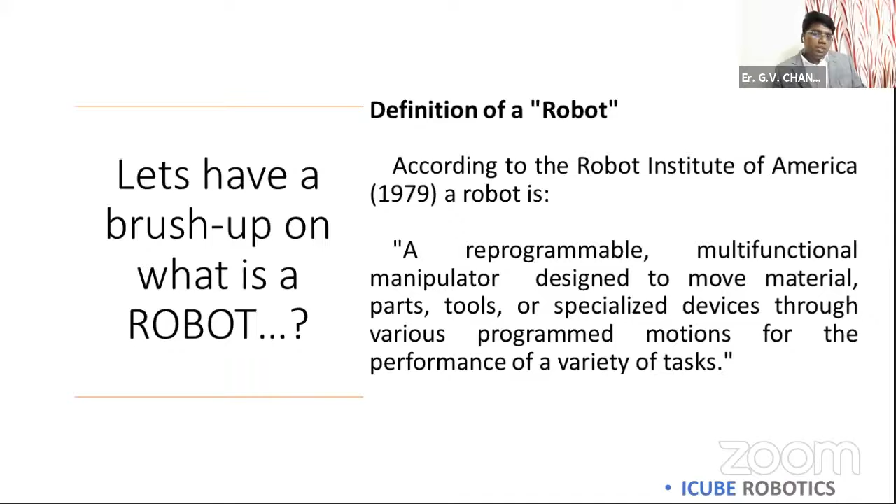That iRobot movie focuses completely on the three laws proposed by Isaac Asimov. Any company producing a robot will be very careful to make sure it follows all three laws. He proposed that whatever robot you make, before it comes into the market, you have to check that it follows three conditions. What are the three conditions?

First, whatever robot is made, that robot should not injure human beings. That is the first criteria of the law proposed by Isaac Asimov.

Secondly, he proposed that whatever robot you make should obey the orders given by human beings, where such orders should not conflict with the higher order law. This means the second law states the robot should obey orders, but not in a way that injures humanity or human beings.

The third law says the robot should protect itself, again with the condition that such protection should not conflict with the higher order law.

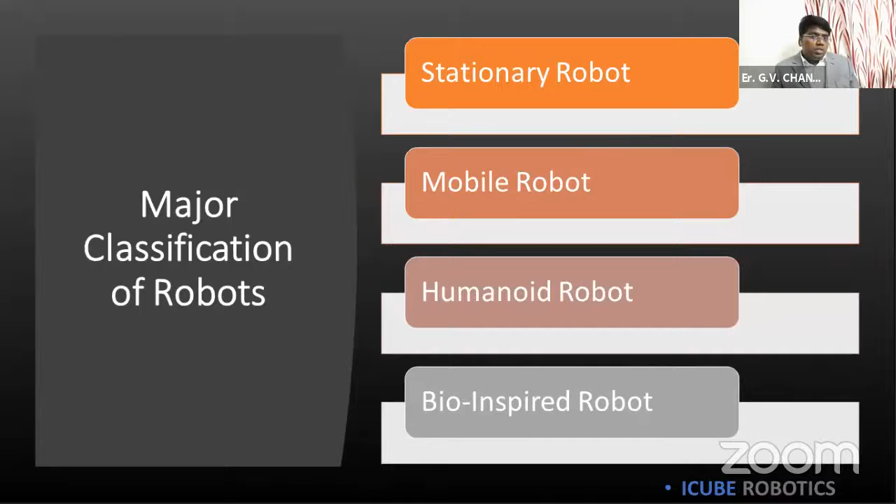Further getting into understanding of stationary robots, we have the serial manipulator and parallel manipulator. A stationary robot is one which is fixed and working. In serial robot, the arm is serially placed, and that's the meaning of serial manipulator. Then we have this parallel robot as well.

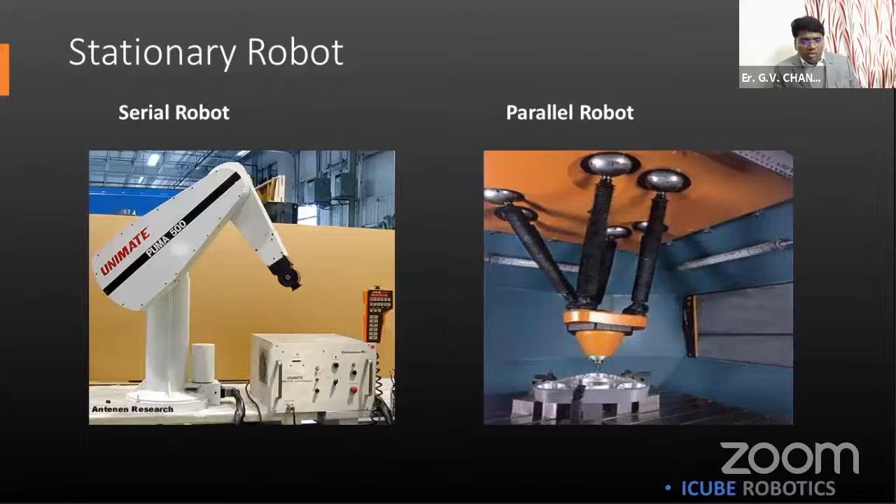Actually, there are a lot of types, so I'll just rush through briefing these things, and let's focus on the trends in robotics much more.

Then we have mobile robots, which can move around. We have Explorer robots, and different kinds of rescue robots also come under this mobile robot category.

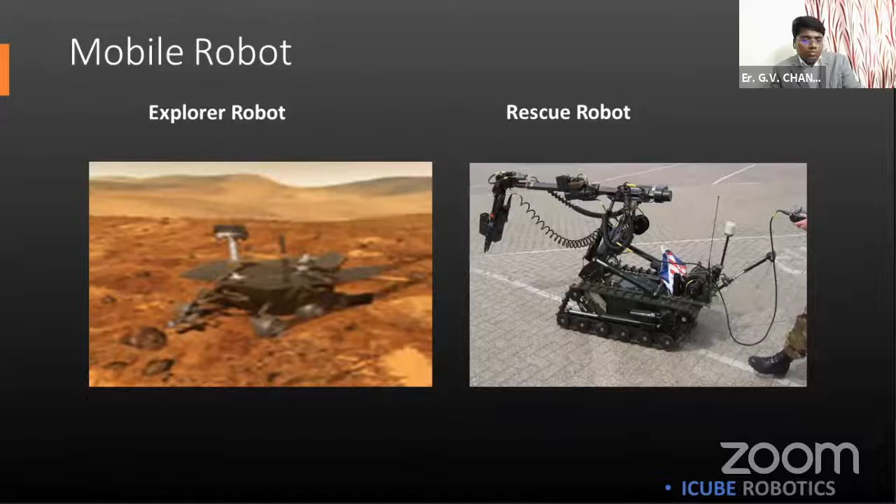And then we have humanoid robots. Basically, if a humanoid robot resembles a male, we call it an android. If it resembles a female, we call it a gynoid.

Even in this video on the evolution of robots, finally you would have seen a robot talking in front of a camera. So here we have this robot, called the Saya robot.

This Saya robot was deployed as a teacher in one of the schools in Japan. Later, the Japan government proposed that in the teaching profession, robots should not be used.

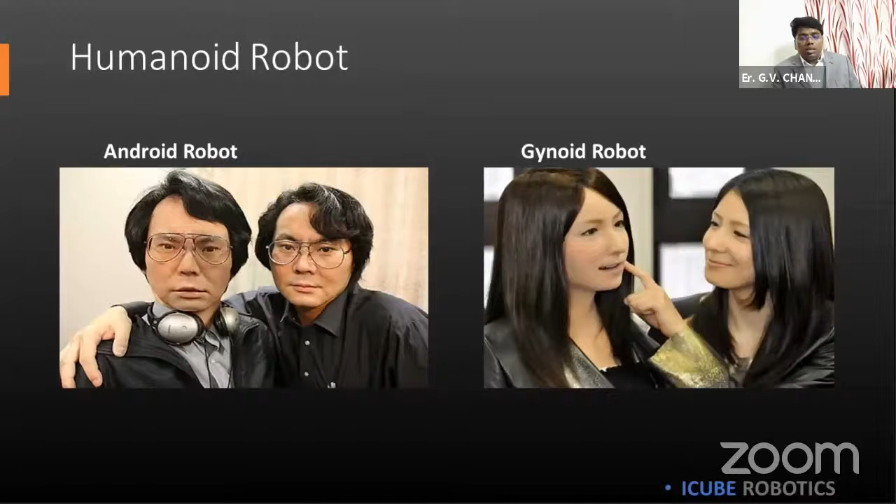We know the concept of robots: a machine is a one-time program, but a robot has an option called reprogramming. With that option, they reprogrammed the Saya robot, and now she is working as a receptionist in one of the hotels in Japan. So this reprogramming concept is what makes a robot different from a normal machine.

Then we have bio-inspired robots. In the slide, the last picture is the world's smallest robot. You would have come across this bio-inspired robot in movies as well, being used in different films.

This actually came into existence after an incident that happened at Taj Mahal Palace a few years before. Nobody was able to enter the hotel to check and see what was happening inside. There, this robot can play a major role, since it can get into or enter through a keyhole.

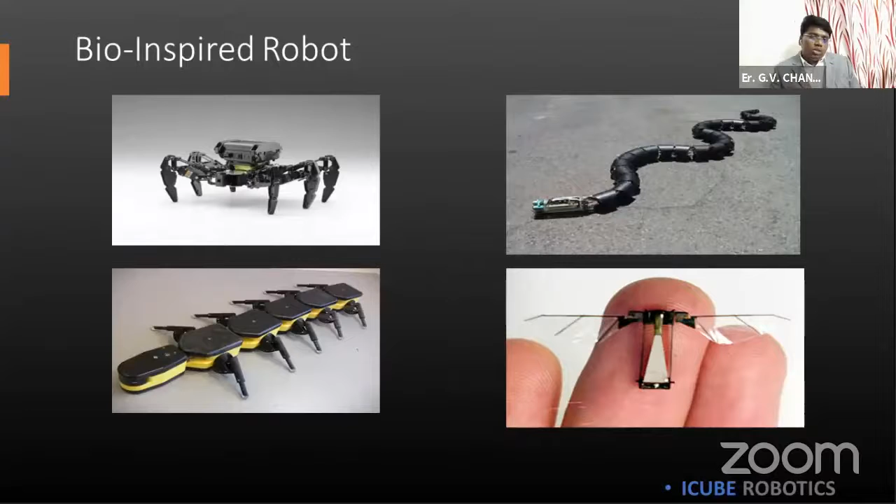So that's its specialty - it's a spy robot. Even a keyhole is enough for this robot to get in, so we could observe what is happening inside and properly take necessary measures.

Now let's get into the mainstream of today's topic: current trends in robotics. There are actually various trends in robotics being placed now, which you would have come across even in Chennai.

There are hotels where butler robots are being used. We deployed a butler robot in ITC hotel in Bangalore six years before. Now a lot of evolution has happened even in terms of butler robots.

Even right now in this COVID situation, robots are being used to serve patients. It now finds a major role in terms of getting into interaction with the patients as well.

So if we focus on current trends in robotics, we have different streams of robots where robotics is being placed, right from medical to military fields. In different fields, robots are being deployed.

The first major role we could see now is in the medical field. Just to add one piece of information for you - most of you in plus two might think engineering is not your cup of tea, and that you are more towards the medical field or science subjects.

But to be clear, technology has to be adopted, no matter where your focus is, even in terms of science. The Indian Medical Association, a few years before, came up with a syllabus integrating robotics as one of the subjects in their final semester paper.

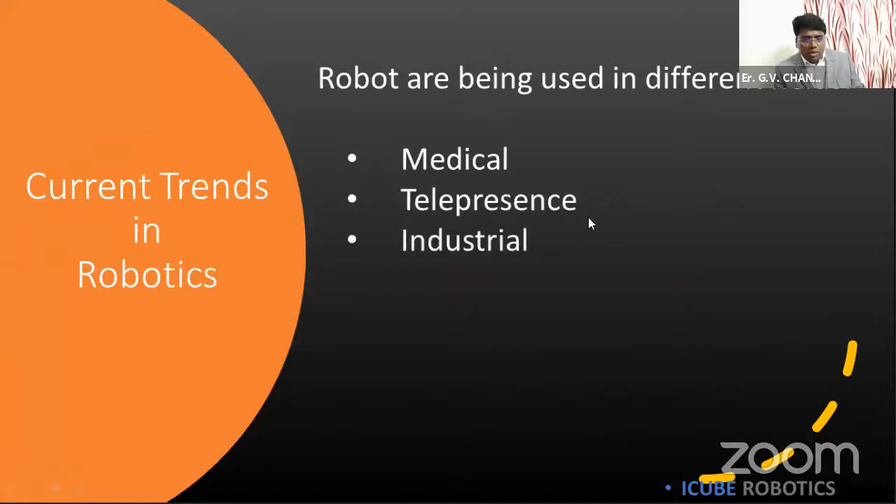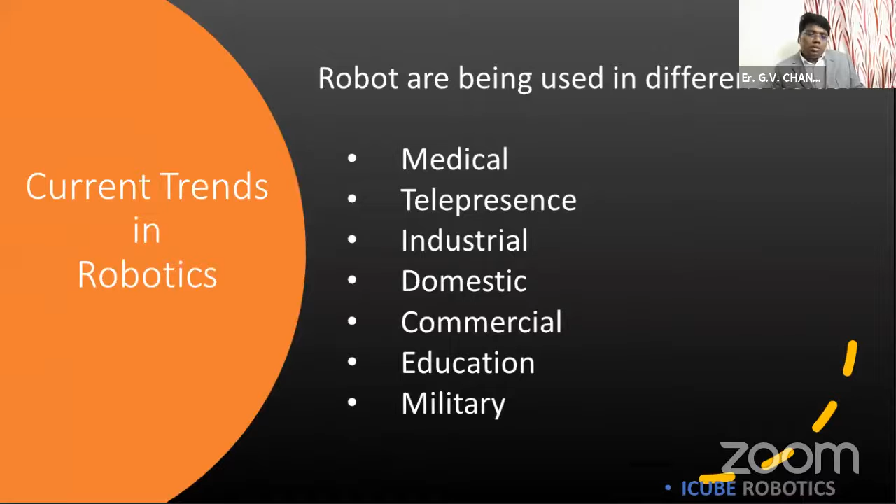So we have the medical field, telepresence, industrial which plays a major role, domestic, commercial, education, and military. Let's focus on the mainstream areas where the current trends of robotics are placed.

The doctor has to equip himself with handling the robot, and on the other side the robot performs the surgery. He wears 3D glasses to see the patient being operated on, and the blood loss is very minimal with high precision in operation. This gives much more clarity and precision during the operations.

Let's see a small video of how this robot is operated.

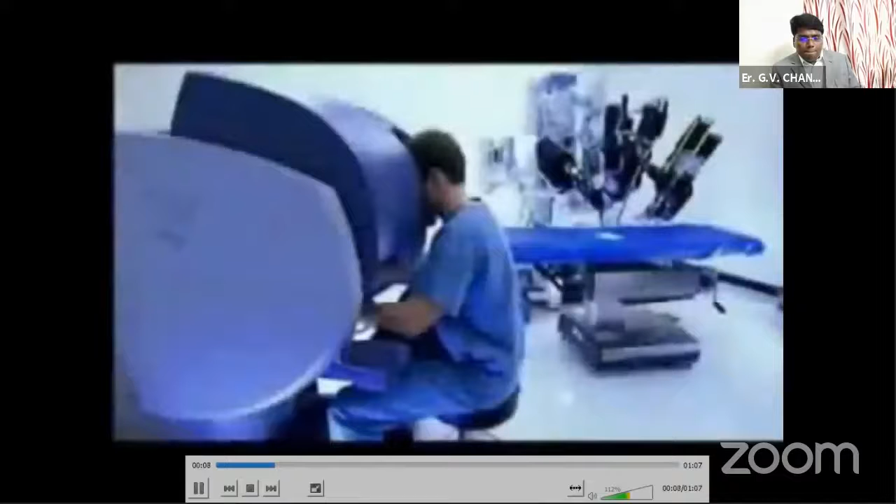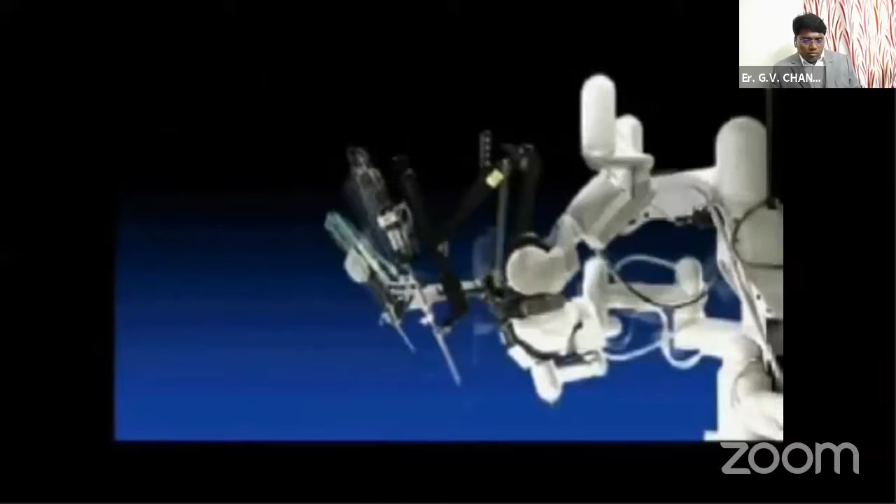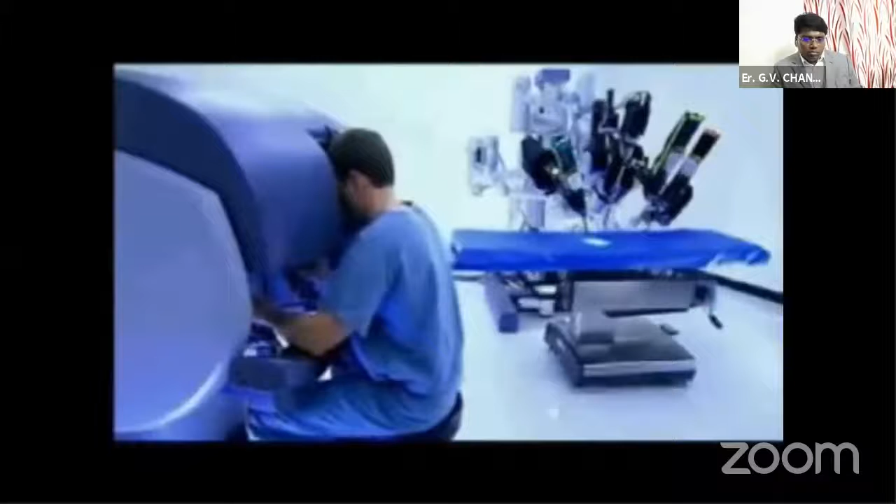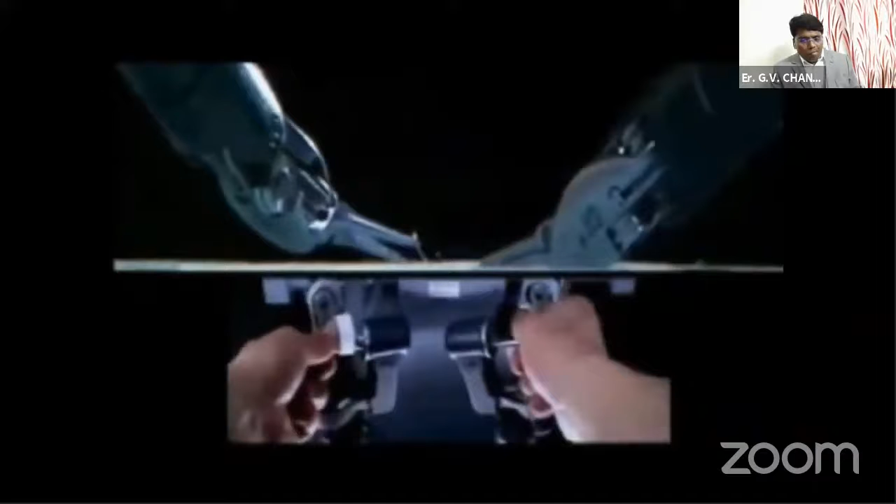The Da Vinci surgical system is a requisite investment for any hospital's minimally invasive surgery initiative. The Da Vinci system is the most advanced surgical platform available in today's market. It consists of an ergonomically designed surgeon console and a patient-side cart with four interactive robotic arms: one to hold and position the high-resolution stereo endoscope, and the second, third, and fourth arms to control high-precision, fully articulated endo-wrist instruments. While seated comfortably at the Da Vinci console, the surgeon views a magnified, high-resolution 3D image of the operative site. Powered by state-of-the-art robotic and computer technology, the surgeon's hand movements are scaled, filtered, and seamlessly translated into precise movements of the endo-wrist instruments. The net result is an intuitive interface, enabling unparalleled precision, dexterity, and control.

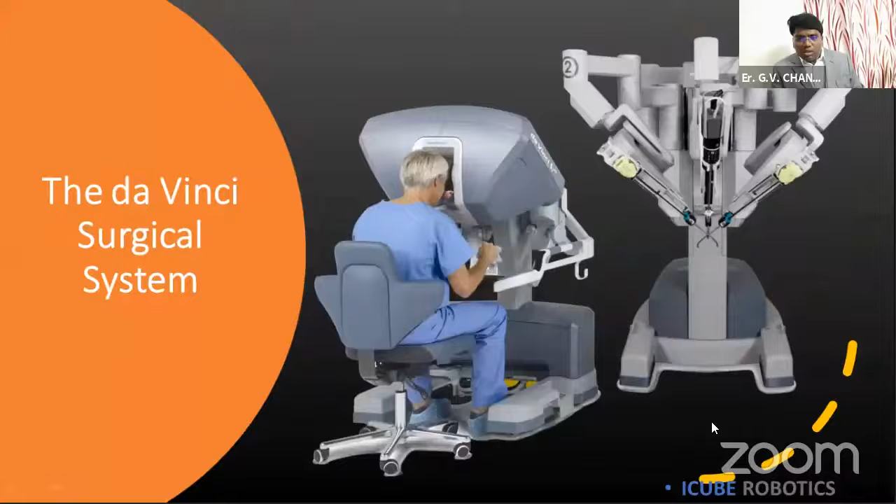So this is a small introduction to this Da Vinci surgical bot. Even in the medical field, this plays a major role. Next we'll talk about the telepresence robot.

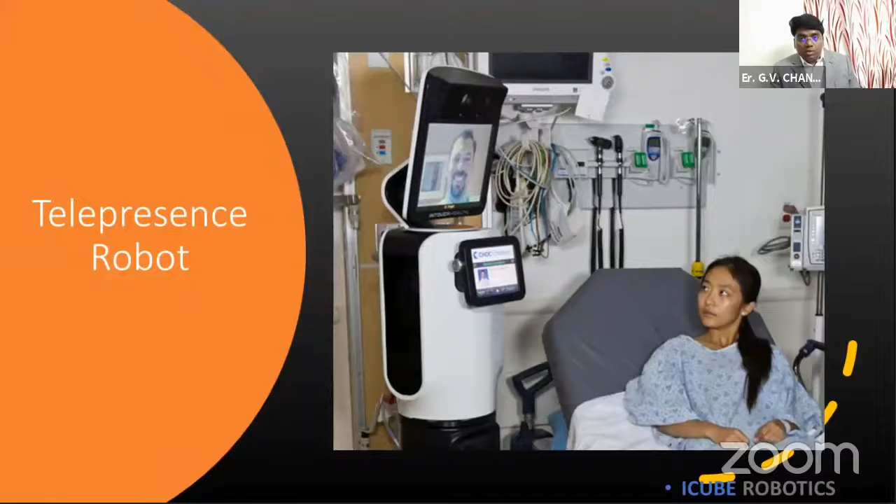This telepresence robot is a current trend. Right now, even in these COVID times, doctors talk to patients using this telepresence robot. In this situation, these robots are being used. Next, we see the industrial robot.

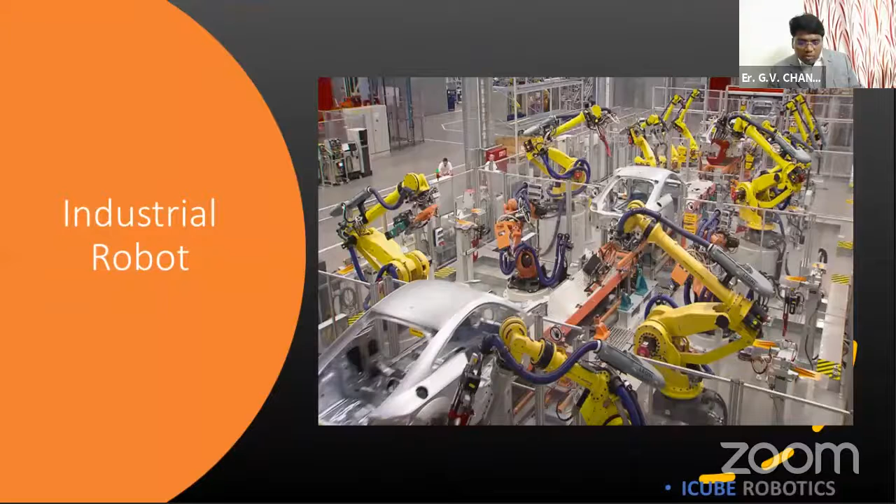Let's see a small video to understand how this robot is deployed in different fields of operation.

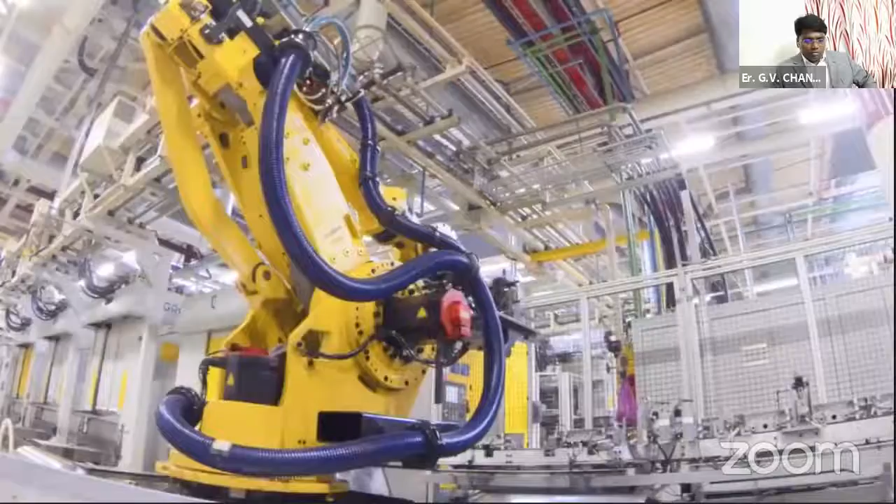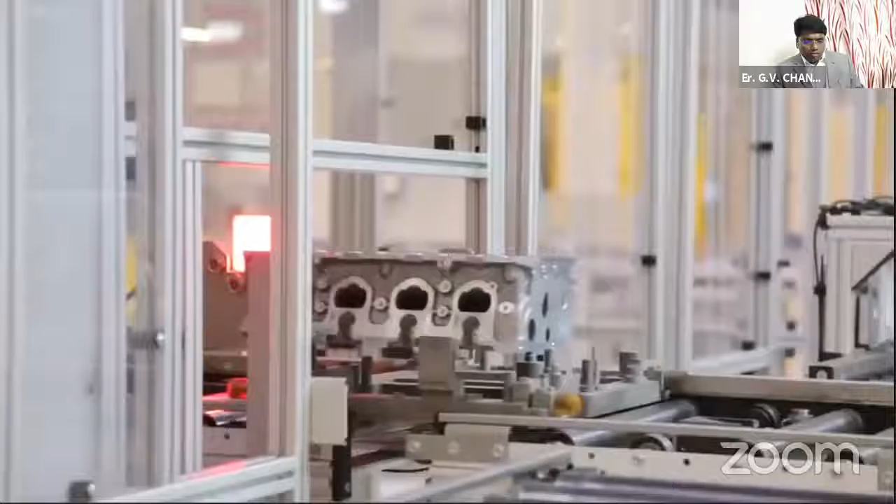Fanuc robots and factory automation solutions have been facilitating industrial production for over 60 years. Fanuc is present in 120 countries, including Hungary, assisting key sectors like the automotive industry, for example at the Audi Hungaria Motor Limited factory in Győr, where they develop and manufacture cars for Audi AG and the Volkswagen Group. Audi Hungaria is one of the companies with the largest turnover and export in Hungary, producing 2 million engines and 135,000 cars in 2014.

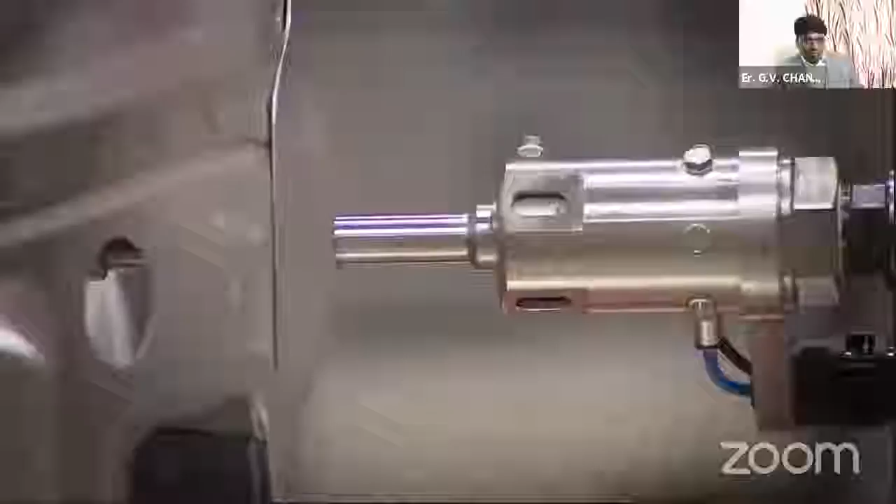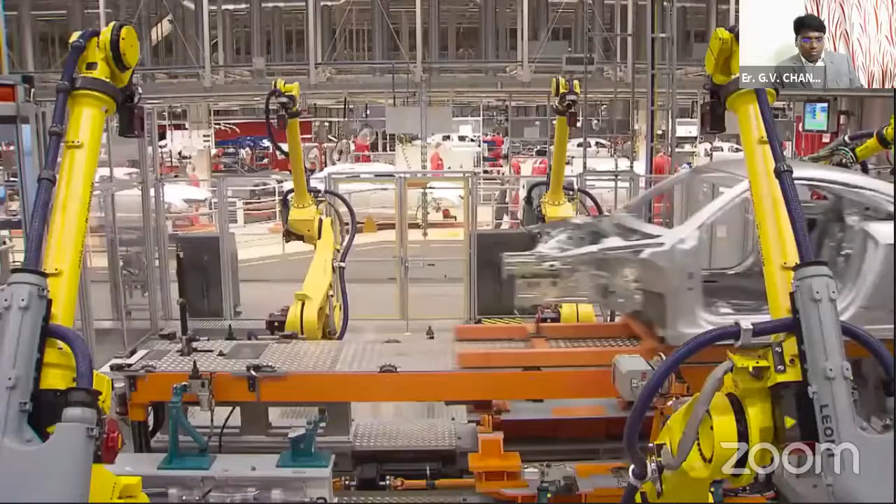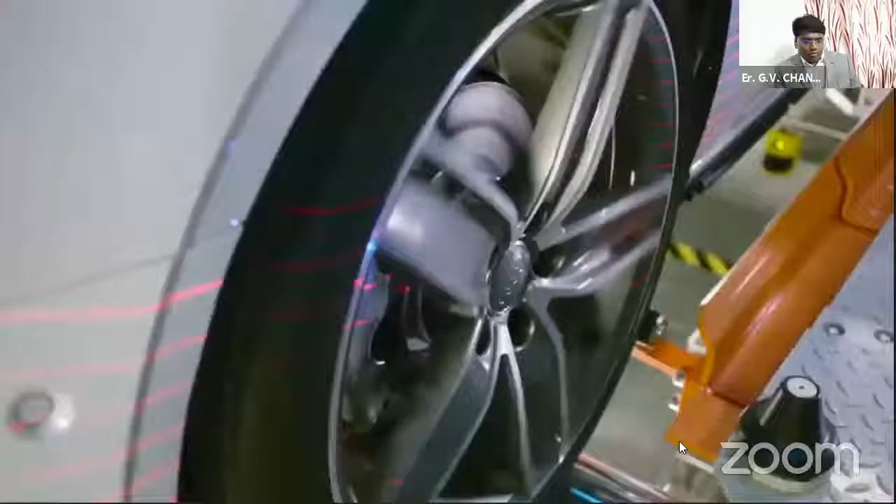In our experience, Fanuc robots work reliably at our factory. We are constantly improving our production and install robots to reach our targets. In environments where we need to work with high pressure or temperature, the robots are up to the task and deliver quality standards which would not be possible with human machining. Essentially, robots are used for applications too difficult for humans or where rapid machining is required. Our colleagues like working together with robots as they make human work easier by delivering these tasks. It's very important to program these robots correctly, because when problems arise, it's usually not the robot that causes them, but improper programming or lack of maintenance. Regarding this, I'd like to highlight that Fanuc robots are easy to program, dependable, and we have very good experience with them.

Like we saw in the video, so everywhere, in terms of manufacturing this unit of the cars, this Fanuc robot arm is being used.

To give you a practical example, recently we received a project from Mahindra City, Mahindra Cars, in Chengalpattu, where robots are being used to actually open the door of the car.

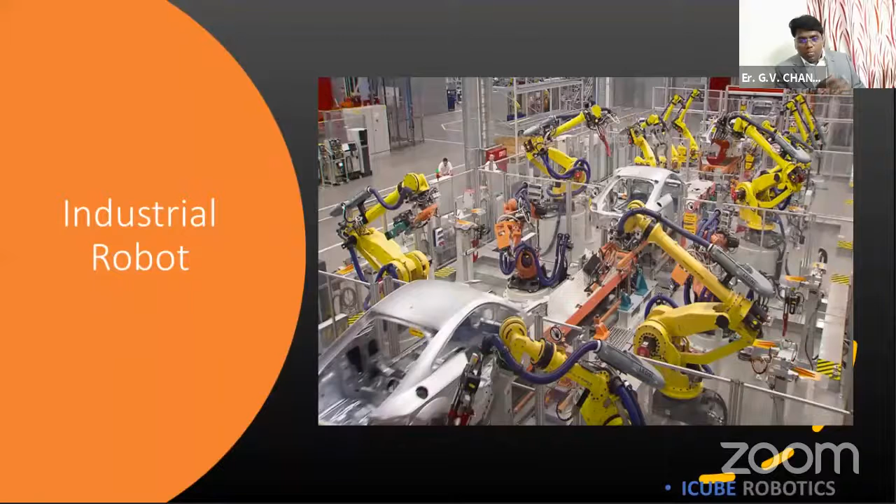Next comes the domestic robot. Yes, even in the domestic field, robots are being used. Even in India, we have the first launched domestic robot in India, called Roomba. That Roomba robot is available in Viveks for a lesser price. It's an automatic vacuum cleaner. When you go to office in the morning before you go out, you can just switch it on, and finally when you come in the evening, the whole floor of your house will be clean. So that is a domestic robot which is being deployed.

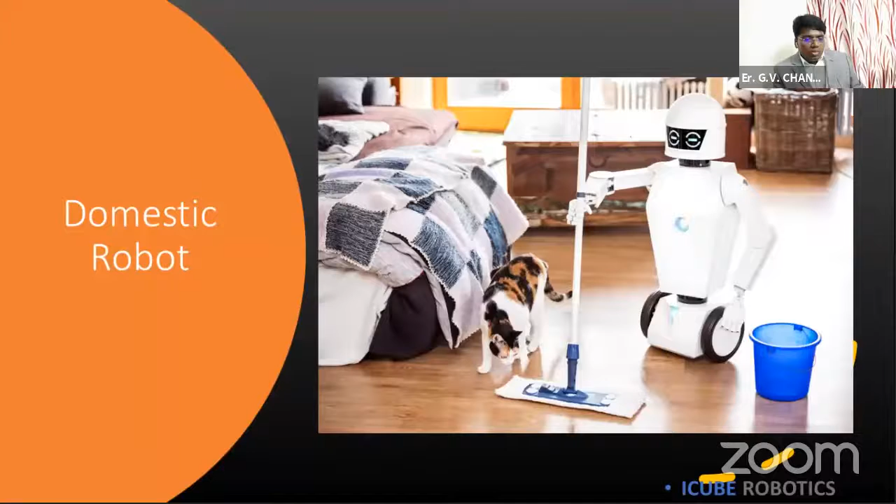And then we have the autonomous car. Majorly the focus of this field, in terms of robotics integrated with IoT, artificial intelligence, and machine learning, comes into the picture of getting into the mainstream of autonomous cars. So you might think that's not possible in Chennai, but actually Mercedes-Benz has already completed its testing in terms of launching this driverless car.

And for your information, practically we have 12th standard students... we have in India already a semi-robotic car available in the market. Can anyone guess it?

Actually, it is a semi-robot which was launched by Volkswagen. It was launched 7 years ago. The name of the car is Volkswagen Passat. That car actually has an auto parking option. You can even check on YouTube how it is working.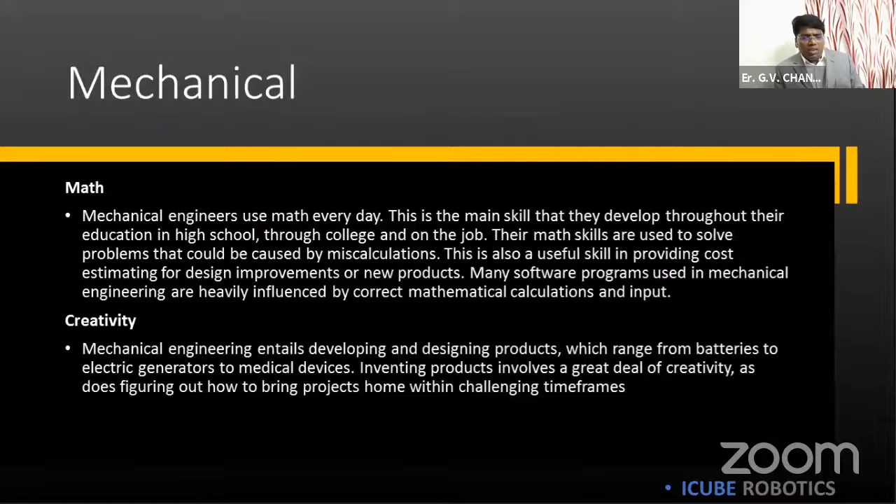So don't have in your mind that robotic engineering means you have to do a separate robotics UG degree. It's not so. As I showed you earlier, we have different streams of engineering. You can take any stream and definitely train yourself in robotic skills, probably in ME, or through a certified course, and then get placed in core robotics companies as well.

So robotics engineers are not exclusively getting into this field through robotics degrees. For example, take me - I'm an alumnus of Aalim Muhammed Salegh College of Engineering, where I got a very basic, strong foundation in electronics and communication systems. With that base, I then concentrated into embedded systems, and then into ES in robotics certification courses.

And then I started my career as a lab associate in one of the robotics labs in India, where I explored a lot of technology in terms of robotics. Then I was placed as a junior scientist, and that's how my journey started. And now we have iCube Robotics.

The reason I started this company is because of my passion to bring robotics to school students also, because the base has to be started there, and in college you have to explore. So right now, being in 12th standard, you have a very good time in these COVID times - ample time to actually equip yourself and get your basics strong.

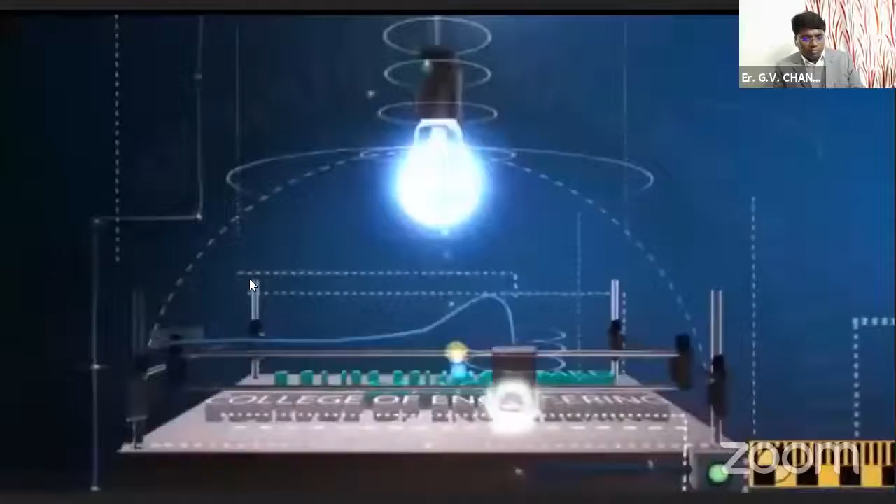Aalim Muhammed Salegh College of Engineering, Avadi, Chennai. Easy transportation facility to reach our college - we provide our own college buses in and around Chennai.

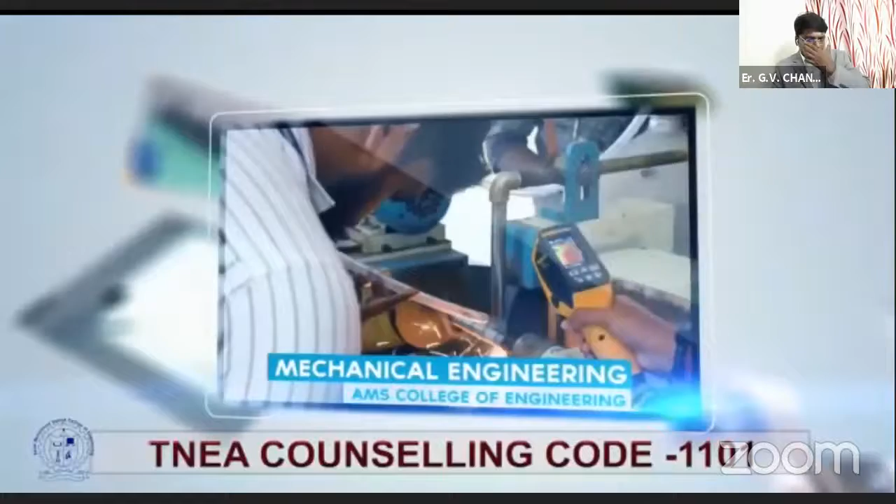Fully air-conditioned computer lab equipped with more than 500 advanced systems. Different methods of education are provided through projector classes. Mechanical labs with different and advanced equipment for which safe hands-on training is provided.

EEE and ECE labs are well equipped with advanced technology devices for practicals. Fully furnished classrooms with interactive sessions of education are provided. In our college library, a large variety of GK and academic related books are available.

We encourage all types of sports and fitness related activities for physical development. We provide hygienic hostel with food facility for both boys and girls. Well sanitized and spacious prayer halls are also available.